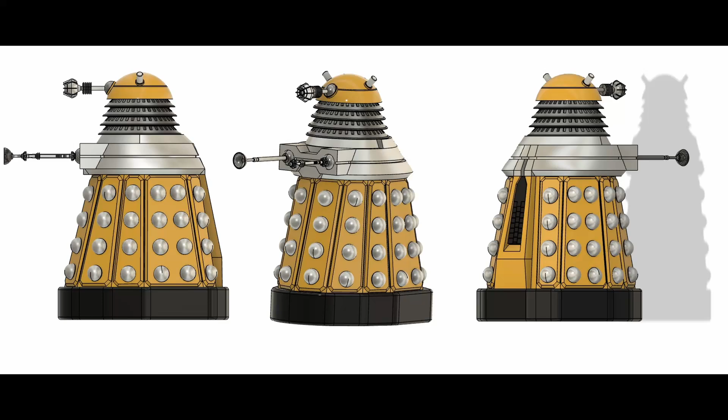Today just a quick impromptu video about using Fusion 360, which is a 3D design software. This is just to show how I did the hemispheres, which are the half circles that are stuck onto the side of a Dalek onto the skirt.

Now the problem with the skirt panels is that they have a twist in them. Fusion 360 only lets you draw on a flat surface, not on a twisted surface. So I'm going to add a plane to sketch on that's a close approximation to this twisted panel on the skirt.

Then I'll do a recess, and I'm going to draw the hemispheres with a slight half mil lip on it, and I'll print them out separately and then glue those into the recesses. That way all the hemispheres look close and you don't have to worry about the twist in the panel.

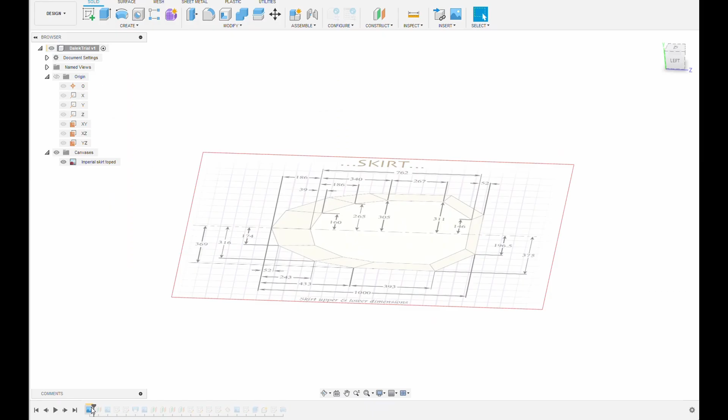Now this is just going to go through the timeline, and I'll talk step by step on how I did it. So I imported two canvases, one on the base layer of the skirt and one at 71 from that, because I'm doing 1/10 scale. It was 710 millimeters. Then I drew two sketches from those canvases, using the canvas as a reference.

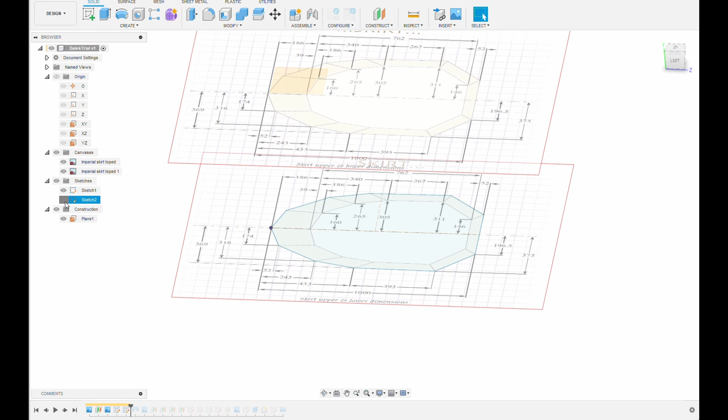I didn't constrain any of these, that's why they're all blue. I normally do. Then did a loft to get to the skirt. Then at each layer where the hemis were, I created another plane. So that's the first plane there, because all the hemis are on the same level. I did that for the 4 hemisphere layers.

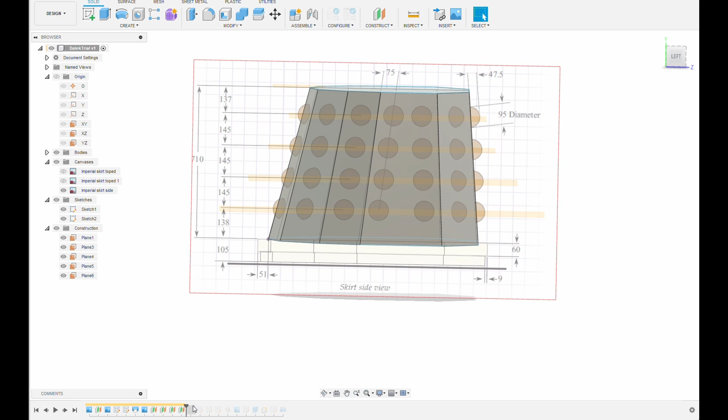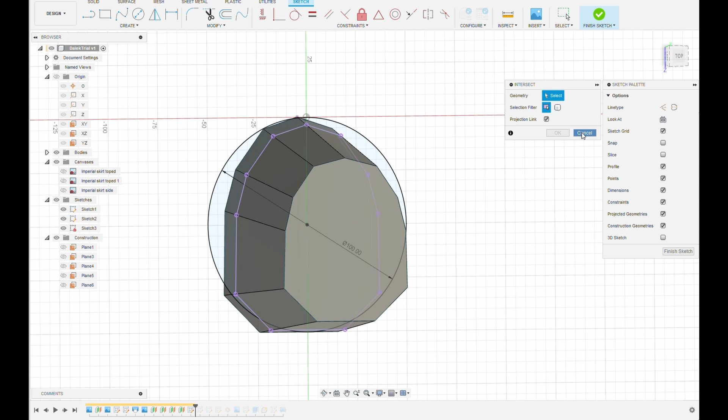And then on this first layer, I just drew a circle that was bigger than the skirt. And then I did a project intersect to get that onto the skirt body. So I did that 3 more times to get the 4 layers of hemispheres. This is just so all the hemis are lined up and I don't have to draw them all for that specific panel.

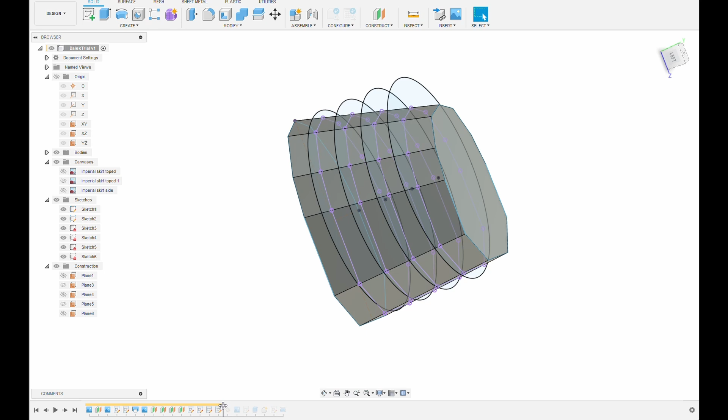So with the 4 levels of hemispheres done, I then created a plane on this one panel. So it was a plane between 2 edges. As I said, the panels are twisted, so this at least gives me a reasonable approximation of where the panel is. From there I did a sketch on that new plane.

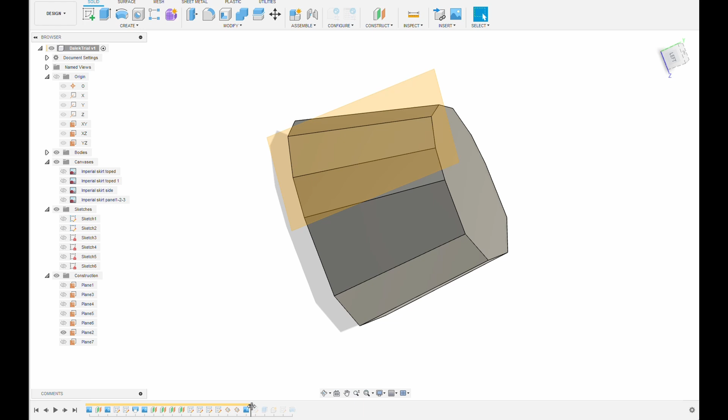So I did the center line first and then drew the hemispheres. So again I projected the lines from the other drawing, so that will allow me to give the center points to the hemispheres. Drew the hemispheres.

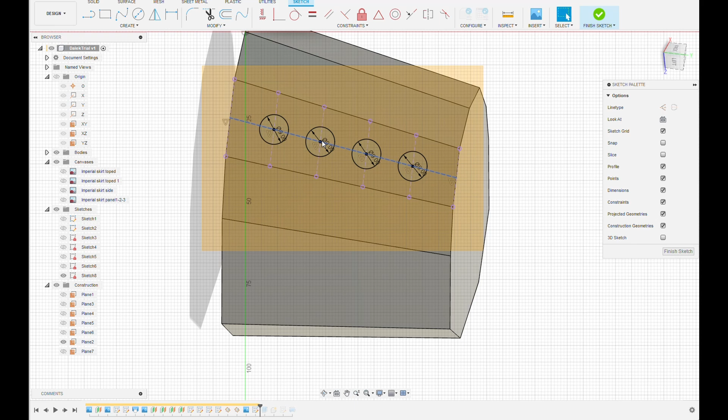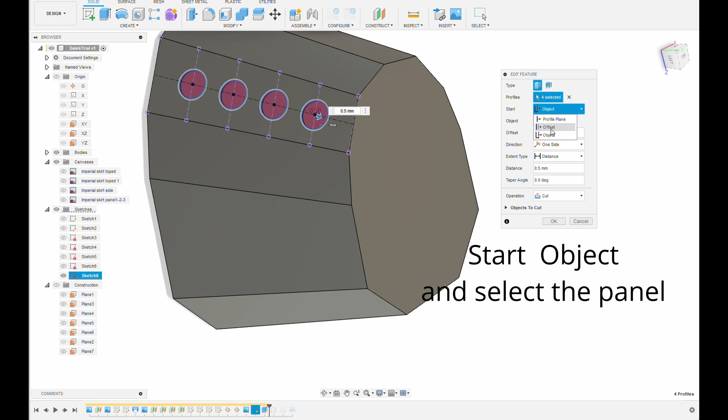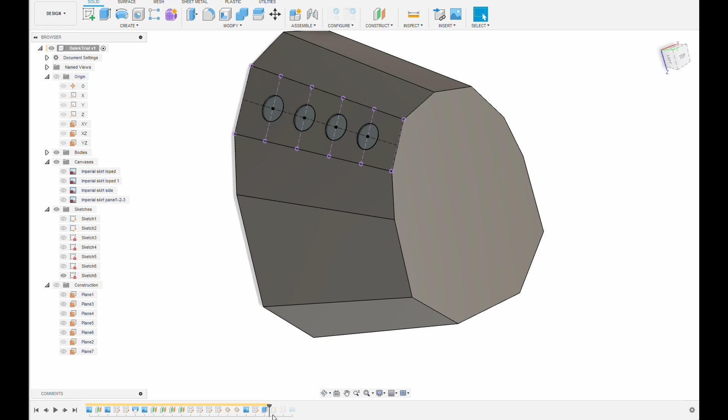So then to extrude them, I made them 1/2 mil deep. So here I did extrude those from an offset, I think it is. Sorry, that was from an object. So the object was the skirt panel itself. And here I just forgot to add that it was 0.5 mil deep. So now they're all 0.5 mil deep from the skirt panel itself, even though it's got a twist in it.

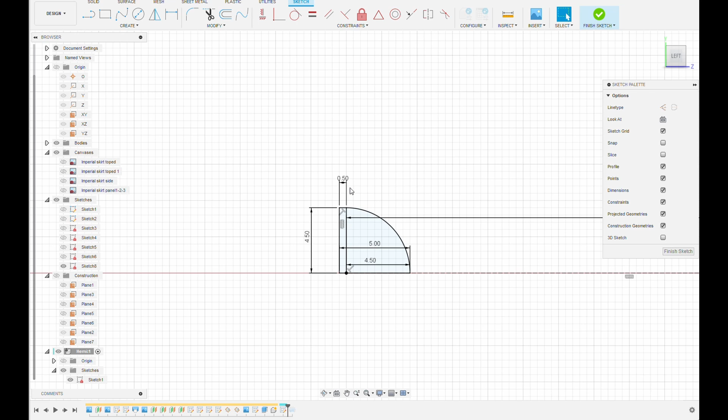And then I just drew up hemispheres separately. So this one's got 9 mil hemispheres, and I just added a 0.5 mil bottom to the hemisphere and created the hemisphere from the revolve command. So that is repeated for every skirt panel. So here's the next one along. Construction plane on 2 edges. And then did the sketch on that plane.

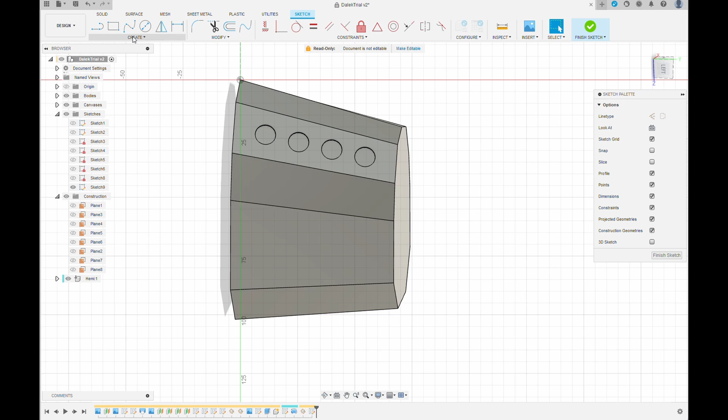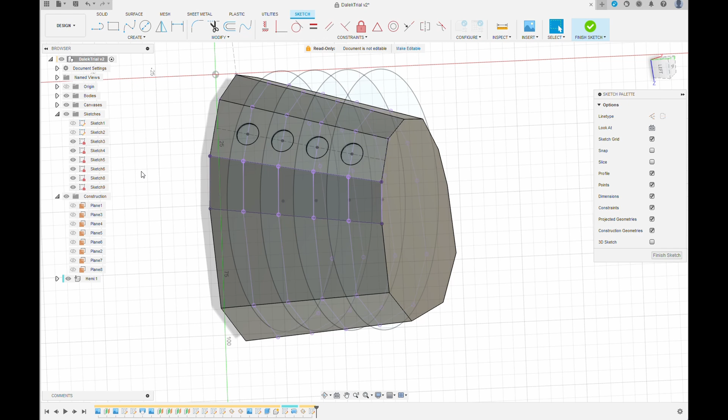Now here I'm projecting the panel itself onto the new sketch. As you can see, that's the purple outline, so that's the panel being projected onto the new sketch. I've added the other sketches that had the intersects on it. Now I'm going to project those as projections. So those are the purple intersects that have been projected onto the drawing. And now I'm just turning those sketches off.

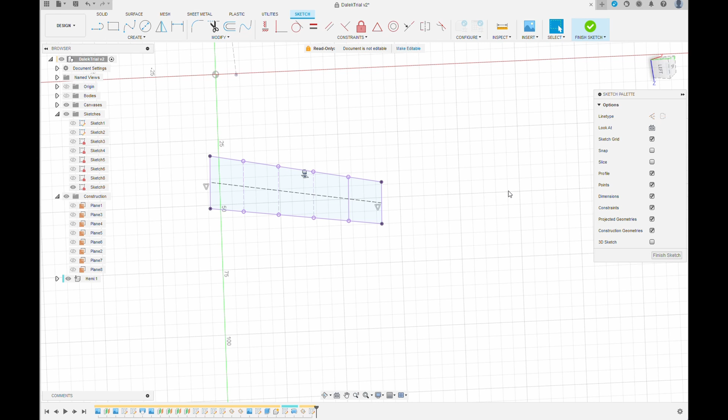Now I've turned the body off. I'm going to make these into construction lines. I'll leave one not as construction lines so you can see what happens. So now I'm just adding the center line, because on this Dalek the hemispheres are in the center of the panel. Some of the panels aren't in the center, but that's on the drawing. You can see that just locks in on the center of all those lines now.

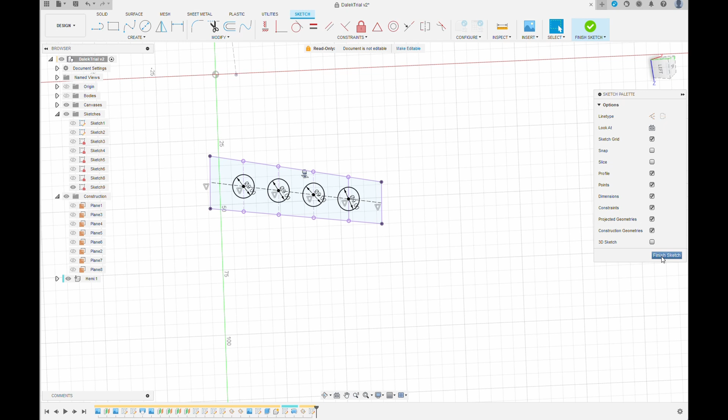So I'm adding the 90 millimeter hemispheres, but these are 9 mil because they're 1/10 scale. So that's all of them in place. So I've turned the body back on so you can see where it is. Now, with the body on, it makes it hard to pick the circles that I want to extrude. So just turning the body off.

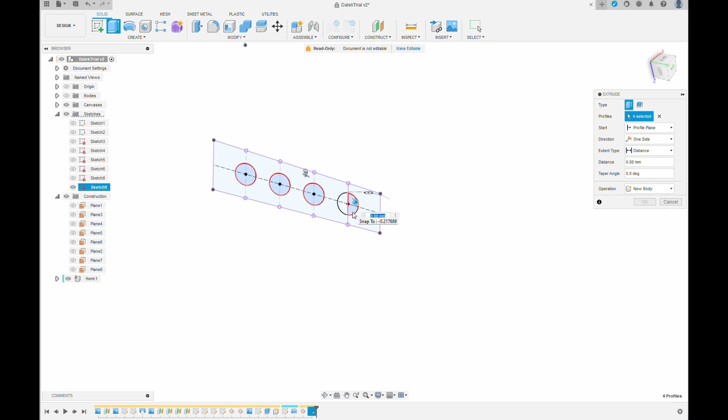So you can see the one without the construction line. I have to treat that as 2 parts of a sphere. That's why I put the construction line on there. So again, I'm going to extrude. I'm going to start at the object, and the object is the panel. And I'm going to extrude down 0.5 millimeters. So that's the second panel done.

So now it's just a matter of repeating that process for the other panels. Because the skirt is symmetrical, it is possible to do one side and then do a mirror command on the other side. That will save you a little bit of time. When they're all done and the skirt gets printed out, it's just a matter of printing out the hemispheres, 54 of them or something like that, and then gluing them into the recesses on the skirt.